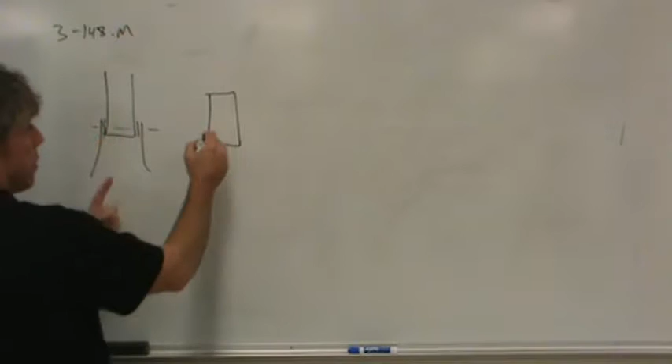Then they also sketched it looking at it from this direction. So you see the tube here, and you see the bolt coming through, and then they've got the A-arm on either side. Now really, the way they've drawn the other figure, you'd expect these to come out and flare like this.

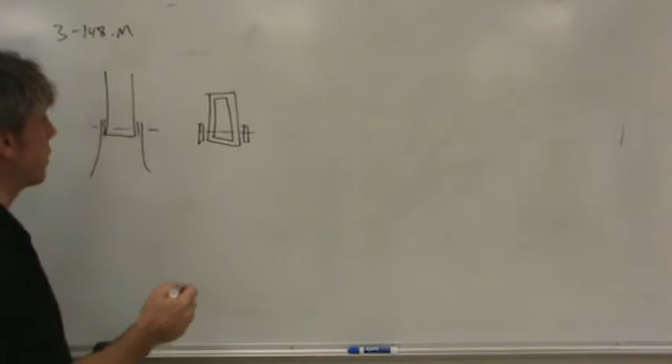So it takes a second to understand what they're talking about. But we're just talking about shear along those two planes for this pin. So it's not a terribly difficult problem. I'll just leave one of these up, we don't need both.

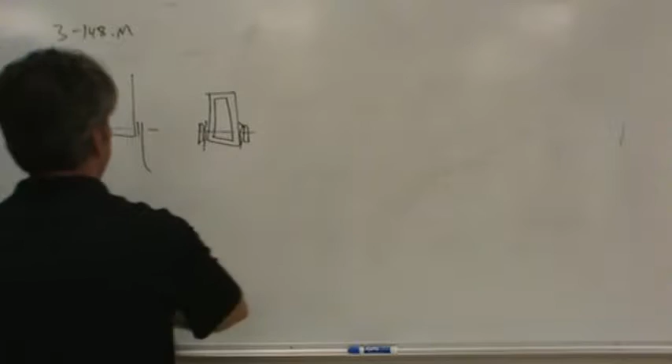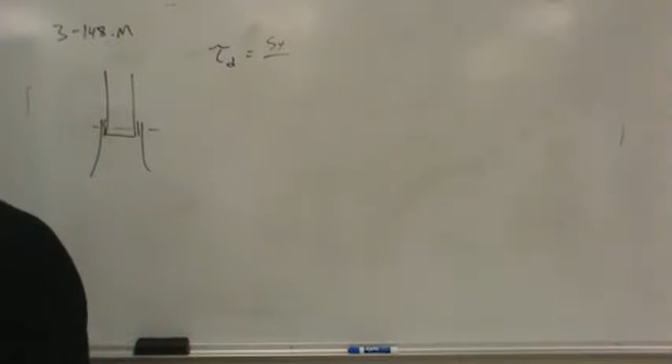What we'll have to do is talk about the design shear stress, which is the yield strength over - normally it's over the factor of safety, but in our particular case, we've got shear in two sections, so it's a double shear type problem. So there's more area basically that.

Make sure I'm talking about the right part. No, I'm getting ahead of myself. Go back in the book if you would.

Here it is, page 158, table 3-8. There's two factors of 2, and I don't want you to confuse them. That's why I stopped saying what I was saying a minute ago.

Okay, table 3-8. They have asked for a factor of safety of 6. What does that correspond to? Impact. Would you expect impact loading on this pin? Oh yeah, every time you hit a pothole, right? Or go over a speed bump too fast, there will be impact.

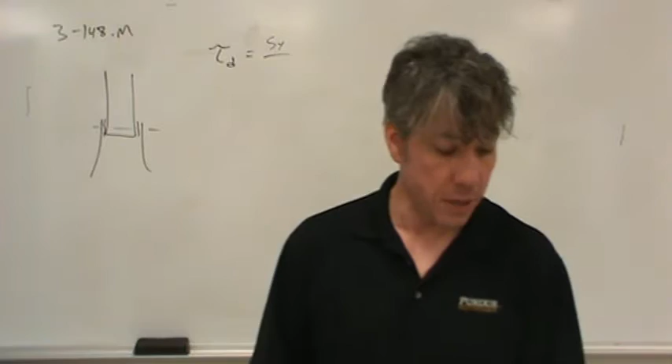What is an impact? Well, it's just basically a high force over a short period of time. That's all it really is. And so this is basically the worst case scenario. And notice the design factor of 6 corresponds to dividing the yield strength by 12. Why is that the case?

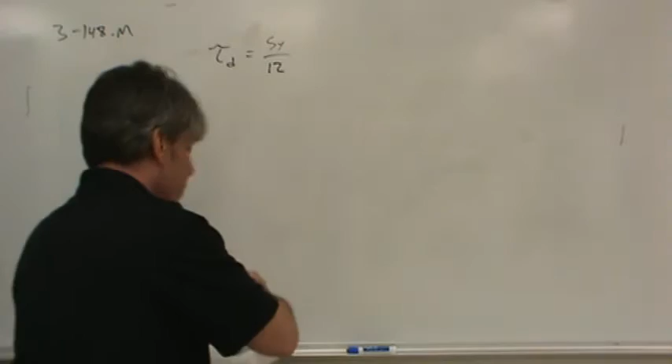Well, I'll explain it. The yield strength is measured with a sample where you're pulling it apart axially. Does that make sense? Well, that's a different type of stress. That's actually not a shear stress, that is a normal stress. And so to convert the normal strength here essentially to a yield shear stress, you have to divide by 2. And then the factor of safety of 6, 2 times 6 is 12, and that's where the 12 comes from.

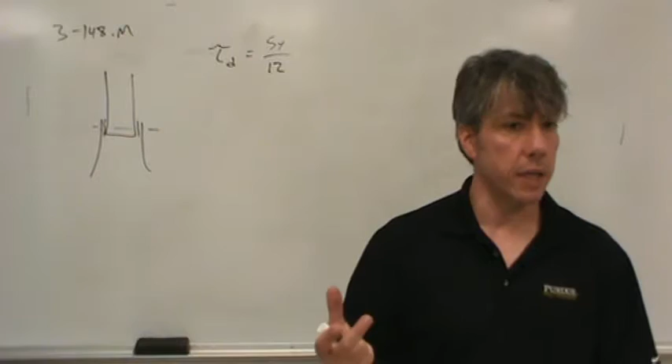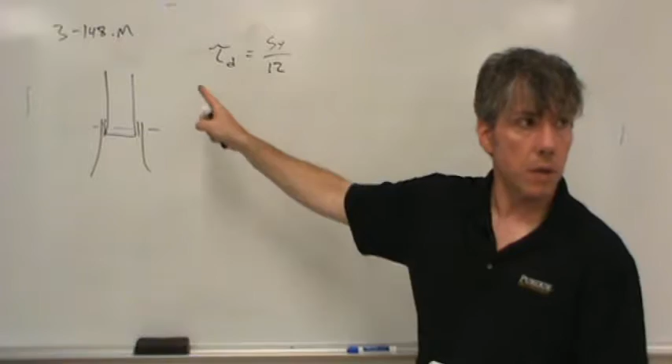Okay, again, we'll talk about this more later when we talk about Mohr's circle and the relationship between normal stress and shear stress. They are related, but we can't give you all of that information at one time, so you just have to trust that we need this factor of 2 because this is a normal stress and we need a shear stress. That's where that 2 comes from. The double shear 2 is going to come in later where we talk about how much area is available for shearing.

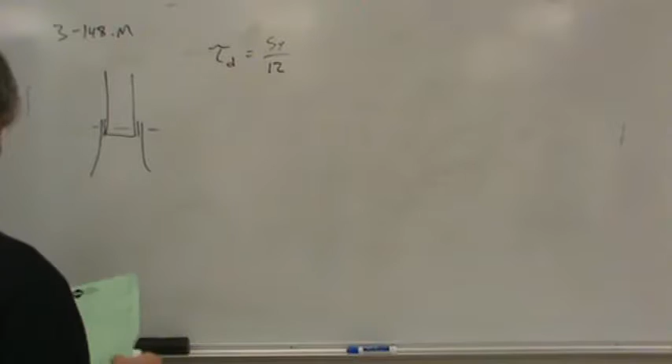Okay? So anyway, if you go and you look up, one more thing about that table - notice at the top that table says it's for ductile materials. So we better make sure that 1040 is a ductile material.

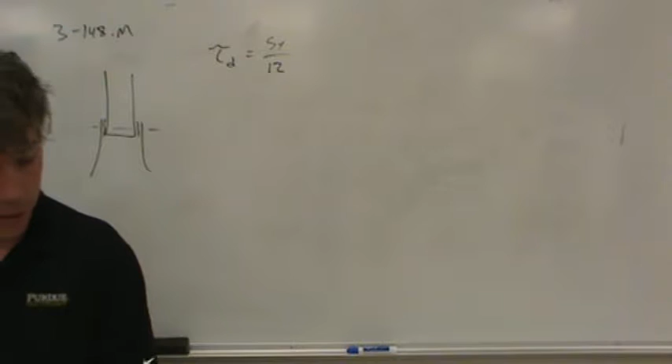So let's go to the back of the book on the material properties. We're interested in 1040, so page 714. 1040 cold drawn has a yield strength of 82 KSI. Notice its percent elongation is 16%. Is that a ductile or brittle material? It's definitely ductile because it's greater than 5%, right?

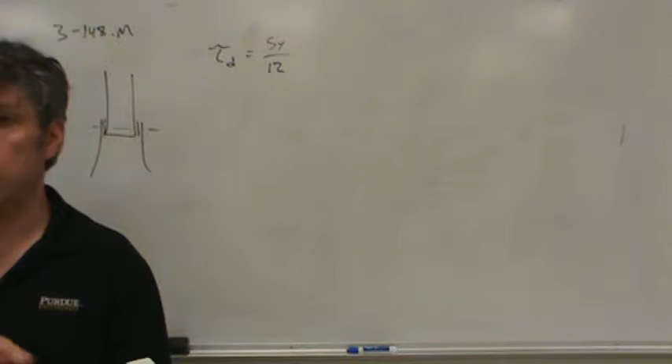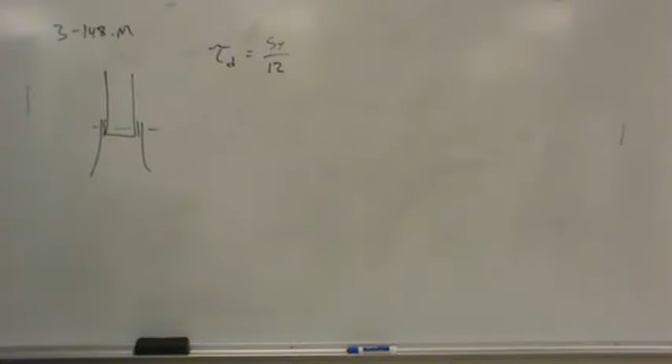Okay, so we're justified in using this equation in the first place because it is ductile. Now, of course, I need to look at my units. We've got millimeters, so we better read off the megapascal version rather than the KSI version. So 1040 cold drawn, 565 megapascals. Everybody see that?

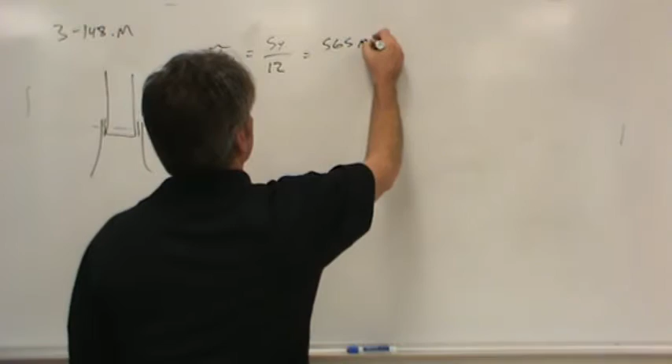So 565 megapascals divided by 12. Plug that in your calculator, you find it's about 47.08 megapascal. So that's the maximum shear that we would allow to be applied to these bolts, whenever they're loaded in shear.

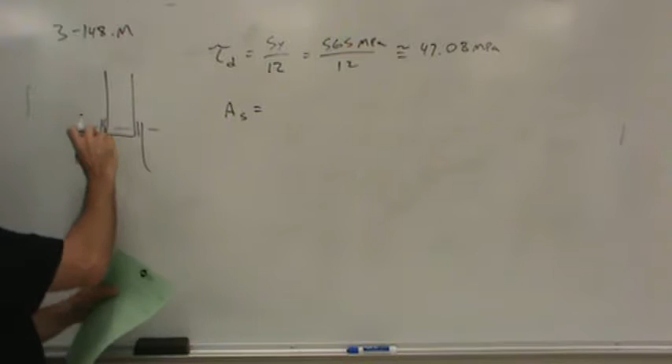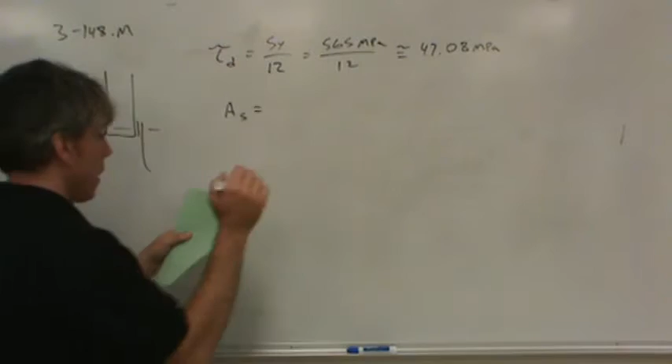Now the shear area that's available - there's a section of the bolt over here, which is just a round section, and another section over here. Notice how the area normal points this way, and the force points this way, so it's a shear type of loading. So the area of shear, there's two of them, and each is pi d squared over 4.

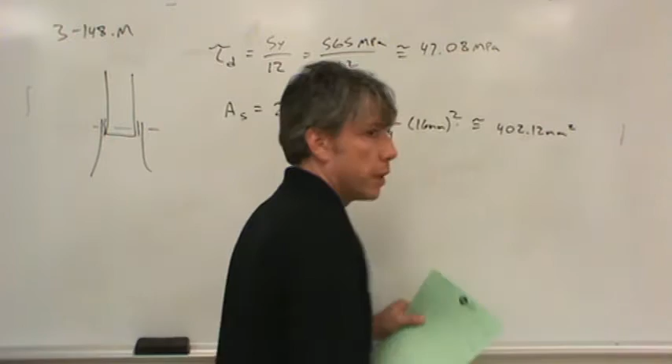So the diameter of the bolt was 16 millimeters, so 2 times pi over 4 times 16 millimeters squared. Plug all that in your calculator. If I did this right, I got about 402.12 total millimeters squared of area. So there's about 200 square millimeters on this side, about 200 square millimeters on this side that's being sheared.

Bless you. I see frowns. Any questions?

All right, so that's the area available. The shear - basically what we're going to do is say the design shear should just be the force over the sheared area, so we can solve for the amount of force that can be applied. So we're not going to apply all 565 divided by 2 megapascals. We're going to apply 47 megapascals instead. That way we have our factor of safety of 6.

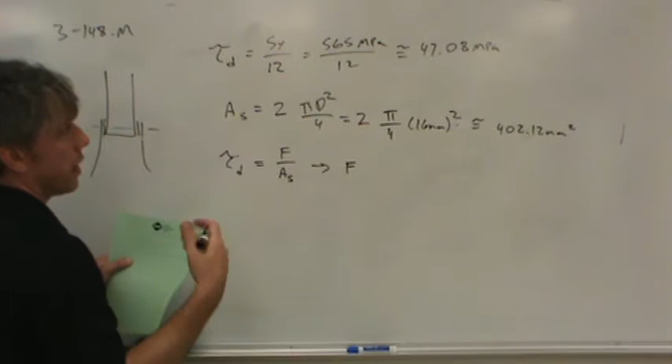So that's what goes in here. And to calculate the force, all we have to do is multiply that design stress by the area that's available to take the stress. So there it is.

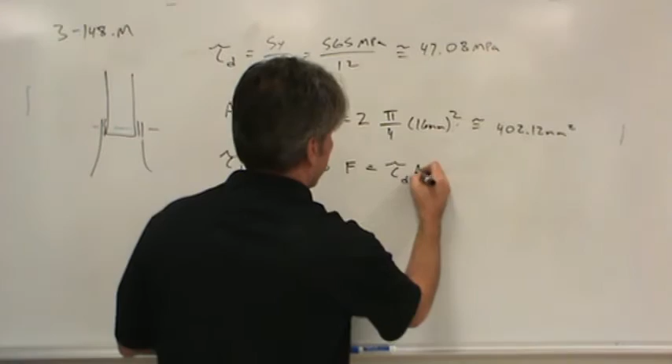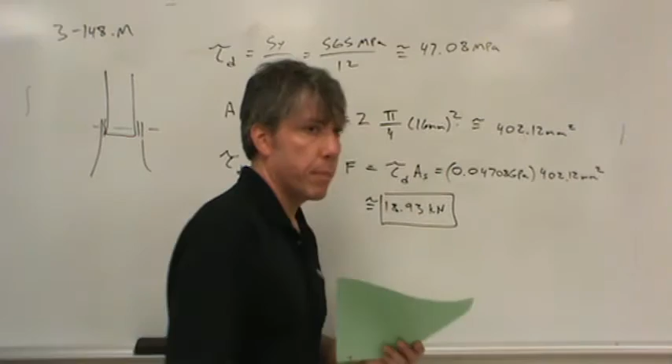So plugging in all the numbers, I'm going to plug in gigapascals, so 0.04708 gigapascals, if you want that many decimal places. And then 402.12 millimeters squared is the total shear area. Perform the multiplication, you find this is about 18.93 kilonewtons. So the maximum impact loading would be about 19 kilonewtons that we could apply.

Okay, anyone have a feel for kilonewtons? Me either. Could you convert it to pounds? You could definitely convert to pounds force. And I'm determined to find the conversion factors in this book. I know he must have them. Anyone know a page number right off?

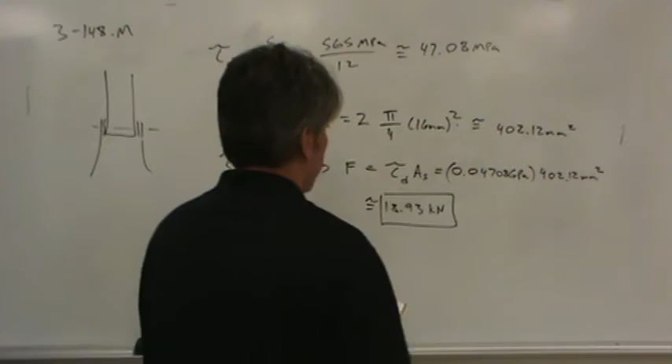Conversion factors, page 743. Found it in the index, or the appendix. 743 - this is a page that you should probably mark, because you will most likely reference it frequently. But just for the sake of getting an intuitive feel for how much force this is, let's convert it to pounds force.

So let's see, force - here's newtons and pounds force. It looks like there's 1 pound force for every 4.448 newtons, and of course kilonewtons to newtons is pretty easy. There's 1,000 newtons per 1 kilonewton. So the kilonewtons go away, the newtons go away.

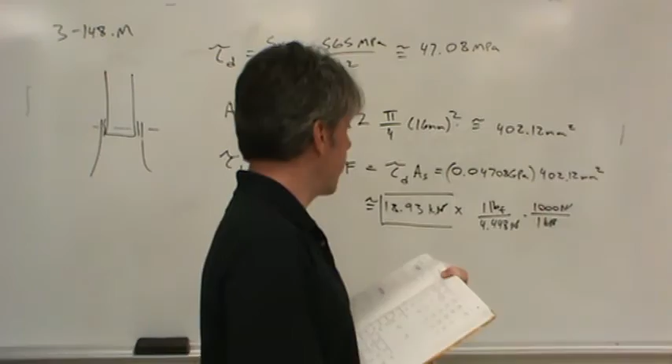Plug that into your calculator, please. And don't forget, we still have a kilo here, so this is going to be kilopounds, not just pounds. Okay? Or no, wait a second, I take that back, take that back. We crossed off the kilonewton, so it won't be - I was wrong, it'll just be pounds force.

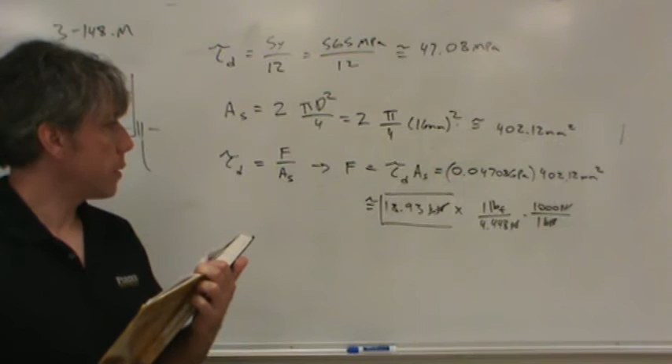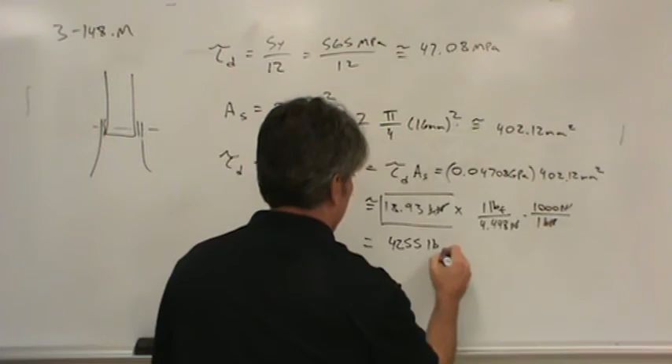Is that a whole lot of impact loading? I don't think it is. I mean, the weight of the car is on that same order of magnitude. So that doesn't look like a very strong, yeah.

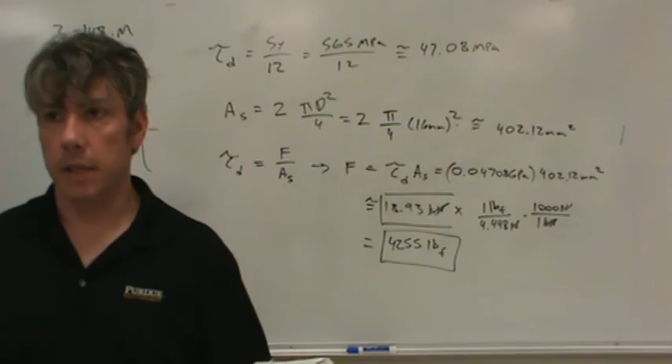What's the units behind the 4.448 underneath the? This is newtons, it's an N for newtons. I got it from the conversion factors on page 743. Good question. Anything else?